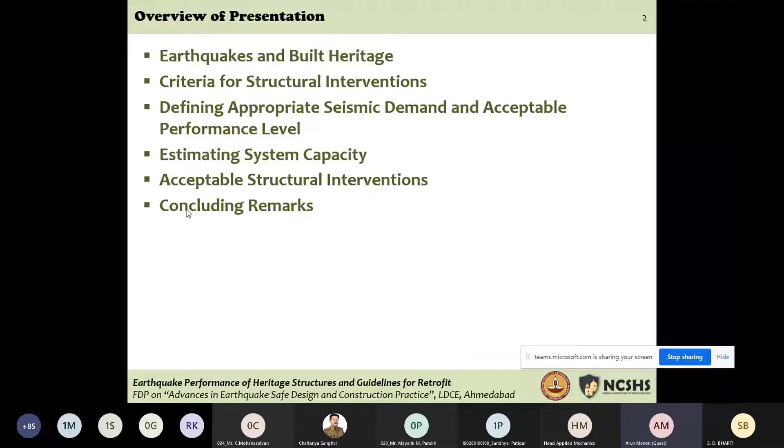So, as I said, LD College is positioned in Ahmedabad, which two decades ago saw one of the worst earthquakes in this country. But historical constructions typically have augmented vulnerability to natural disasters. The Bhuj earthquake is just one example.

In fact, records previous to the earthquake and post-earthquake tell us that Kutch district alone had about 15,000 enlisted heritage properties, and about 10,000 of them were destroyed or extensively damaged. So you're talking of one event that lasts for a few seconds that can wipe out two-thirds of what human beings have been able to build over centuries.

So that's only one event, as I said. There are multiple events: the Indian Ocean tsunami in 2004, the Kashmir earthquake in 2005, the Sikkim earthquake in 2011, the Kedarnath floods in 2013, the Kashmir floods in 2014, the Nepal earthquake in 2015, the twin earthquakes, the Myanmar earthquake in 2016. Of course, after that there have been smaller incidents, but the big ones have given us a respite of about 5 to 6 years now.

Within a context of multi-hazard assessment, it is important that we focus on earthquakes, which are sudden accidental loads that come onto these constructions. But we should remember that these constructions are susceptible to multiple hazards, and that's why floods could be a problem, cyclonic storms could be a problem, and one has to examine it within a context of multiple hazards.

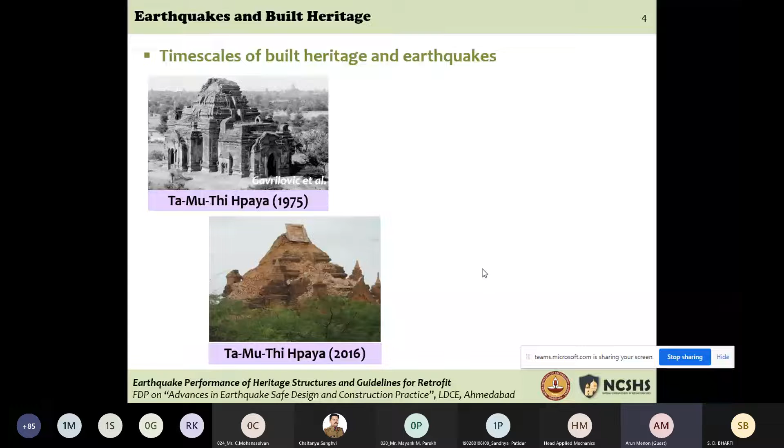So this is one of the monuments damaged in a big earthquake that happened in 1975. But in 2016, 41 years later, an earthquake comparable in magnitude and effect to that same earthquake occurred, and it's the same monument I'm showing you, from a slightly different location. There was reconstruction of significant portions of the spire, and in 2016 we see exactly the same damage. So you're seeing the same monument affected by two significant earthquakes within a span of four decades.

In this context, there's this fantastic book that those of you interested in this subject should look at. The name of this book conveys everything. In fact, this is one of the few books where if you read the title, you understand what the author really wants to say in all the pages of the book. This is a book called Between Two Earthquakes, written by Sir Bernard Fielden, who is considered the father of modern conservation worldwide.

If you go to the website of the Getty Conservation Institute, GCI, of the Getty Foundation, United States, you will be able to download this book for free. It's called Between Two Earthquakes: Cultural Properties in Seismic Zones. In the preface, Sir Bernard Fielden very eloquently says, lessons must be learned continually, and we must always be aware that we live between two earthquakes as far as cultural heritage property is concerned, because these have been around for such a very long time.

And that's very true. If you're looking at our neighborhood, then you know that the Bhuj earthquake in 2001 was preceded by the Allah Bund earthquake in 1819. The Nepal earthquake in 2015 had a history that in 1934 we had the famous Bihar-Nepal earthquake. And Bagan, here I was talking about 1975 and 2016. So you see, it may be 180 years, it may be 75 to 80 years, it may be 40 years.

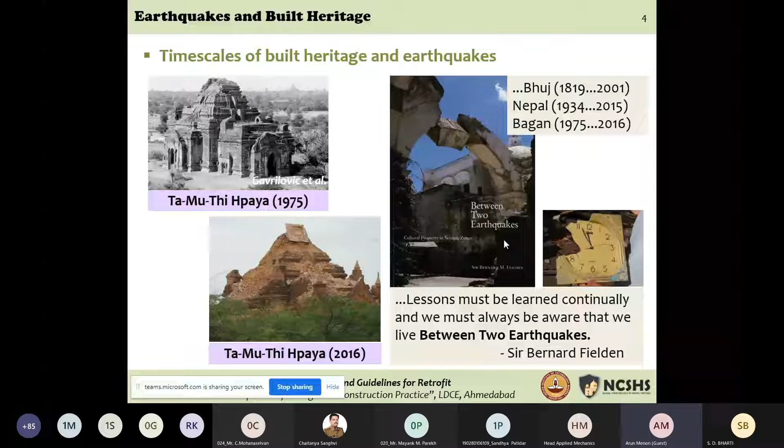Now, the same issue of the timelines between built heritage and earthquake, in a different context, in a different sense, was also very eloquently put forth, particularly for the Indian subcontinent, by Professor Jain, who was at IIT Gandhinagar all these years as director. And I call it the magnitude frequency conundrum of the Indian subcontinent. Professor Jain, in a very interesting paper in 2005, says we have to reflect on the memory and the impact of relatively high frequency of large earthquakes versus relatively low frequency of moderate earthquakes.

So if you have a region that is subjected to frequent moderate earthquakes, then the inhabitants of the region, in their own lifetime, have seen multiple moderate earthquake events and are mentally prepared, and change construction practices to protect their constructions. Whereas if you're living in a region where moderate earthquakes are just too few, don't happen, but large earthquakes are rather frequent—every 50 years, every 70 years, every 100 years, every 180 years—then the problem is the current generations do not have an idea of what it means to see heavy damage in an earthquake.

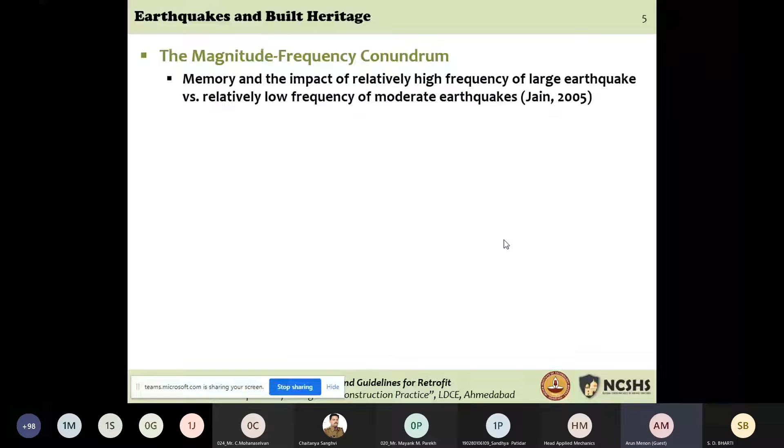It may pass one or two generations before the next massive earthquake comes. Unfortunately, since the memory of the earthquake is not present, the construction practices are not necessarily reflective of the potential vulnerabilities that exist. This is a problem of the Indian subcontinent, where moderate earthquakes are too few and large earthquakes do occur—the Andamans, the Himalayan region, Bhuj, Kutch Peninsula. So this is a problem peculiar to the Indian subcontinent, and one of the fundamental difficulties we've had in improving earthquake safety in our country.

If you actually look at the 475-year return period global seismic hazard map, you will see that it really reflects the problem we talk of. A large part of the country is in moderate to low seismic zones, and there are regions where large earthquakes can be expected, but the frequency of these large earthquakes versus the frequency of moderate earthquakes is what is affecting earthquake safe practices in the country.

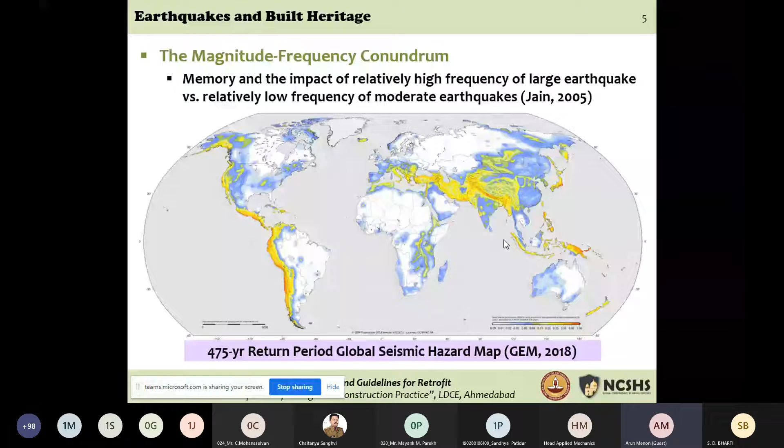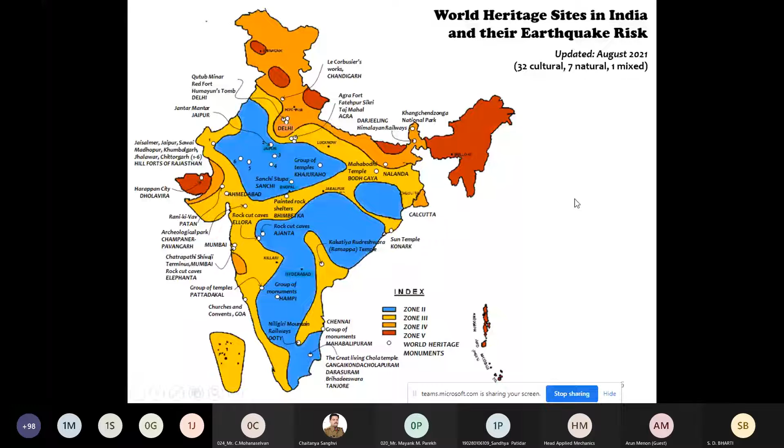Let me now give you a general overview of historical constructions particular to the Indian subcontinent, and take you through the reasons for their earthquake vulnerability.

One of the most common construction typologies is the post and lintel construction, or the trabeate stone construction. The word trabeate comes from the Latin word trabs, meaning a beam. So post and lintel construction, merely placing lintel beams or beams on posts, is called post and lintel or trabeate construction. If you were to look at the trabeate constructions...

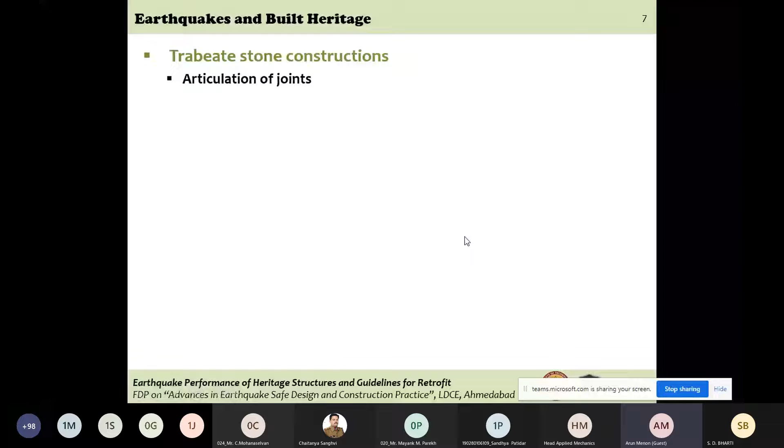The articulation of the joints between the post and the lintel has been a point of focus. How do you connect the post and the lintel is an important aspect that needs attention.

But if you were to look at different regions in the country where these are constructed, and I take the example of South India or peninsular India, where there is a very large number of such constructions, we don't see any articulation of joint, any specific detail in the articulation of a joint between the post and the lintel.

This possibly is a reflection of a region's low seismicity levels. If you take South India, in the last 500 years, the largest earthquake has been a magnitude 6 earthquake in 1900 in Coimbatore. There is no evidence of any other larger earthquake in the southern part of peninsular India. So it could well imply that these constructions are the way they are because this is a low seismic region.

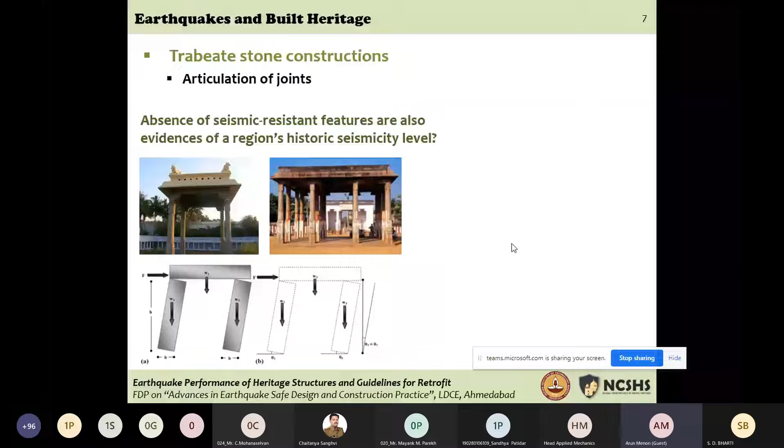However, in these regions, even if there is a moderate event, the consequences can be alarming. So that is something that we need to definitely worry about.

If you were to, on the other hand, look at similar constructions in Kathmandu Valley, or even similar constructions in Bhuj or in the Himalayan region in Kangra Valley in Himachal, you will see that the post and lintel constructions go through an important articulation of the joint. You will see tenon and mortise joints, as you can see in this picture here.

There's a projection in the stone and a depression in the plinth, or vice versa. You will see that the joints are articulated. You have shear keys that have been introduced in the construction typology, in the construction features. This is clearly the seismic resistant construction vocabulary, I would say, in these regions.

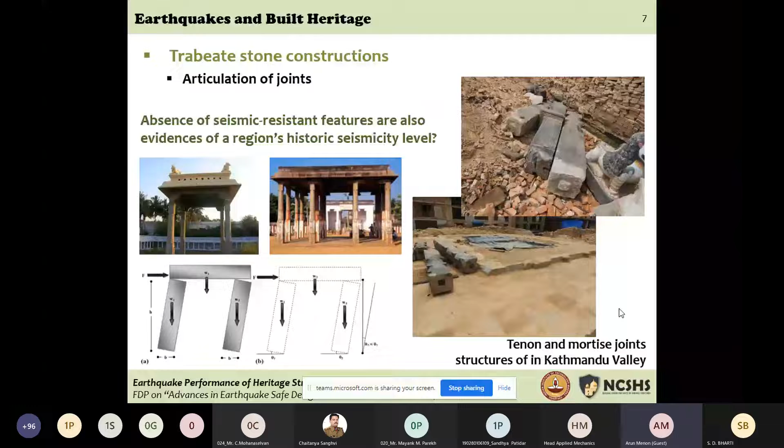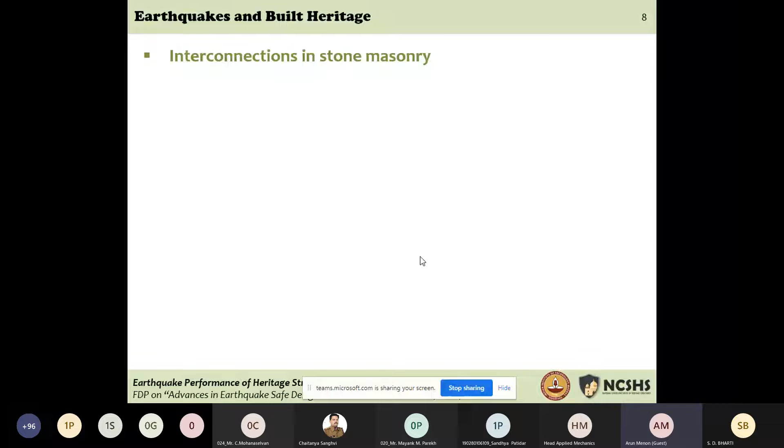We also see interconnections in stone masonry. So stone masonry is typically built without too much of binding material like mortar.

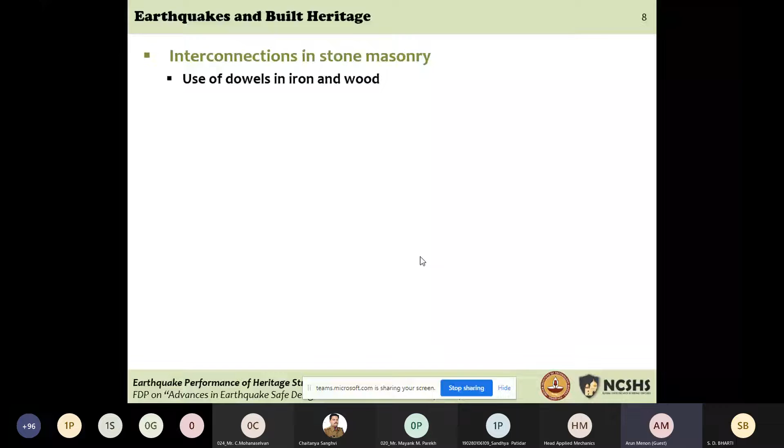The mortar is present more as a leveling agent rather than a binding agent with any tensile capacity. So typical dry stone constructions are connected using dowels in iron and wood. The classical example that I can think of is the stone constructions in Gujarat.

This is a picture from Ahmedabad itself, Achyut Kuki's mosque. The tower had partially collapsed in the 2001 earthquake. Examining the construction, we could very clearly see how two blocks of the circular tower were held together with wooden dowels, embedded in sockets cut out in the stone and filled with lime mortar.

Over time, the wooden dowel would deteriorate, and the lime mortar would get washed away, and ultimately you're just left with dry stone construction, which does not have any tensile capacity, nothing holding these blocks together. In an earthquake as severe as the Bhuj earthquake, you could have collapses like the ones that you see here.

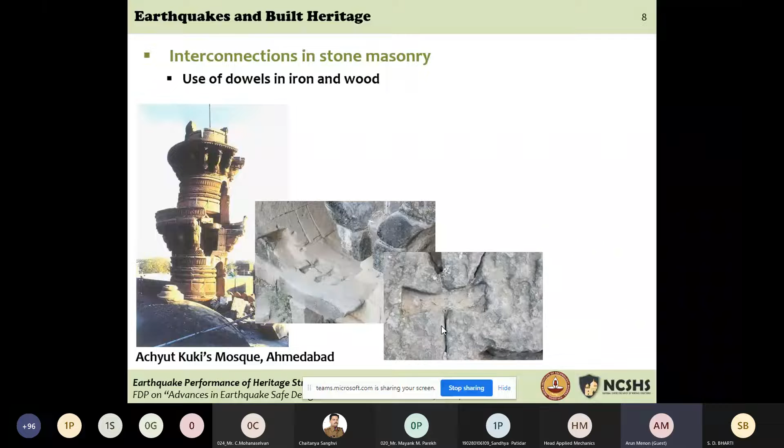A similar situation, these are pictures from constructions near Patan in Gujarat. You can see very clearly what I'm talking about. Two stone blocks placed next to each other with a little depression cut out in the stone, into which lime mortar is placed and the wooden dowel is embedded. This helps keep these blocks together, something that has zero tension capacity because there is no binding mortar with tensile strength. These dowels, made of wood, which has some amount of ductility, help keep these blocks together.

If you go to Kangra Valley, look at Himachal Pradesh constructions in Kangra - this is Kangra Fort, which was very badly affected in the 1905 Kangra earthquake. Large parts of the Kangra Fort collapsed in that earthquake. You can see how the construction, possibly the reconstruction, has made use of iron dowels, used to basically interconnect these blocks of stone masonry.

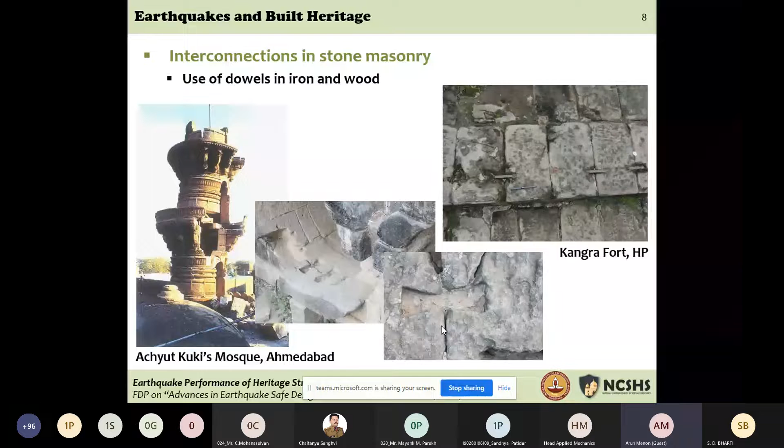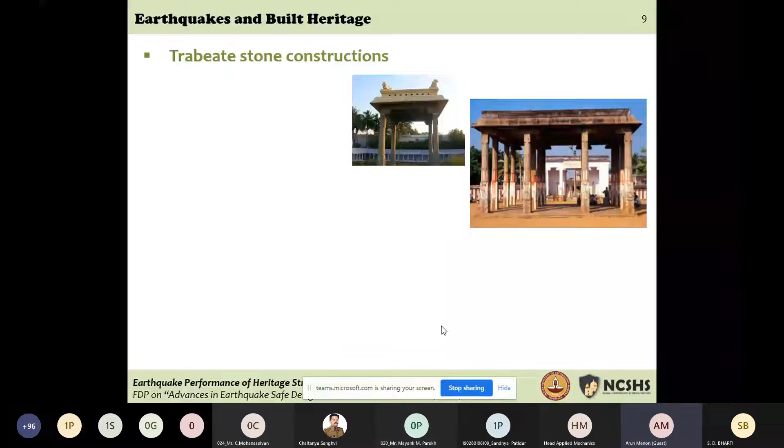Interestingly, South Indian constructions, these mandapas - you're looking at 16-pillared, tall, symmetric constructions. They could also be tall or short, 4-pillared mandapas. You could also have a series of configurations which are even asymmetrical constructions. We have looked at studying these constructions for their earthquake safety because we were interested in understanding the vulnerabilities historical constructions have in low to moderate seismic zones.

Through limit analysis, rigid block analysis, which is actually quite appropriate for such post and lintel constructions without the use of binding mortar, you identify which is the governing failure mechanism. In this case, the governing failure mechanism is really the overturning failure.

This is the static limit analysis that is conducted, which is typically a lower bound capacity that you would get.

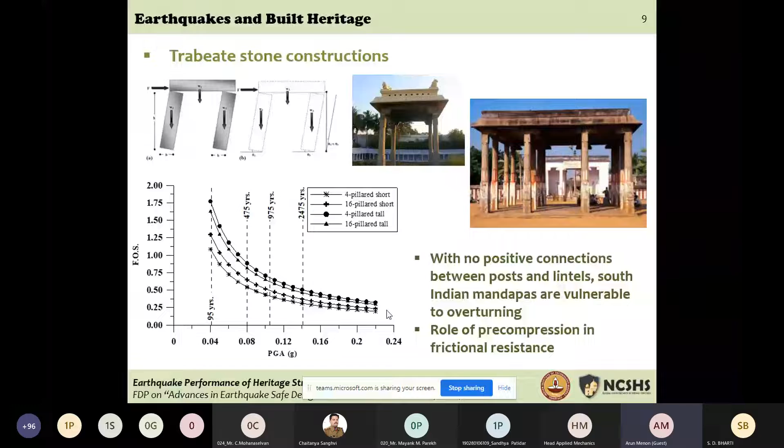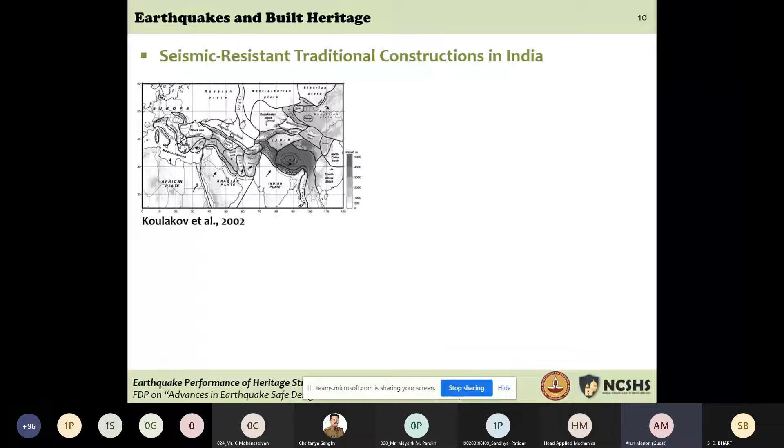If you were to look at the traditional constructions in India, not the historical monumental constructions, but traditional constructions - India has a significant stock of traditional seismic resistant constructions that have developed over several hundreds of years in regions of high seismicity. I'm sure Professor Durgesh Rai and Professor Hemant Kaushik, I don't know if he has spoken to you, but I've definitely spoken to you about some of these interesting constructions.

Dhajji Dewari in Kashmir, the Taq construction in Kashmir, the Kath Kuni construction in the Himachal region, the Ekra or Assam type construction in Assam and Sikkim are important examples. Also another interesting example which is in your neighborhood is the Pols of Gujarat, and Pols in the historical center of Ahmedabad.

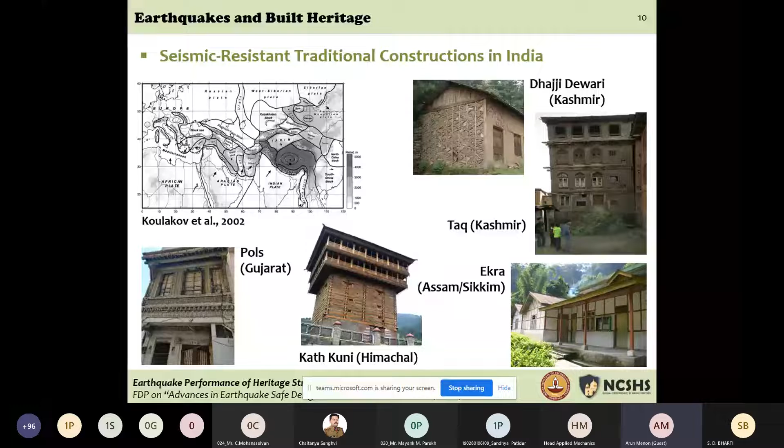While the Dhajji Dewari, Taq, Ekra and Kath Kuni constructions have a vocabulary of construction system which is very clearly responsive to earthquake actions, the Pol constructions are not that well understood. They have survived well during earthquakes, but you do not have a very systematic earthquake resistant feature in the Pols, and so one needs to understand this quite well.

With respect to this, the question always on my mind has been: were they designed to be earthquake resistant, or are we deeming them to be earthquake resistant looking at how well they have actually been working, or are those features present in them consciously introduced to ensure earthquake resistance? There's been enough examination of this problem by people in Gujarat and elsewhere.

I had this interesting opportunity of studying it a little carefully with one of the students from CEPT University, working on conservation, a master's in conservation and rejuvenation.

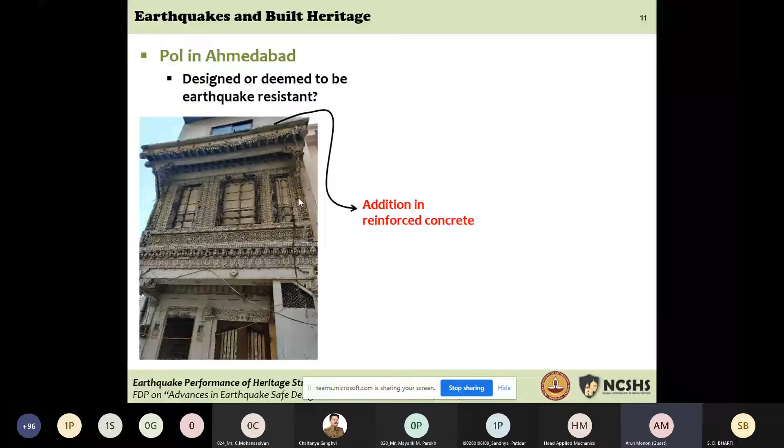The reason why one has to look at such problems a little more carefully is that a number of these Pol constructions, if you take the historical center of Ahmedabad, are undergoing modifications, although they are protected World Heritage city portions of the built heritage. There are simple things like floors being added in reinforced concrete or replaced, and new elements in reinforced concrete are added.

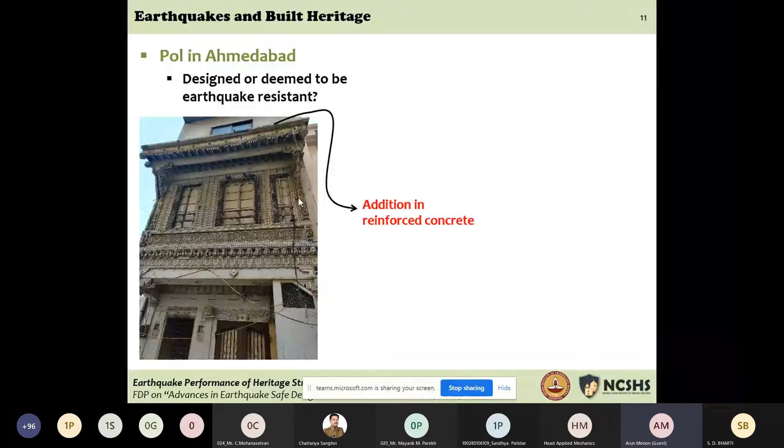The question is, how do we understand the original construction? What are the governing characteristics for good earthquake response of such constructions, and what should we be careful about when these are undergoing renovations, expansions or restoration? As I said, this is rather well documented, but structural studies on these have not really been done quite extensively.

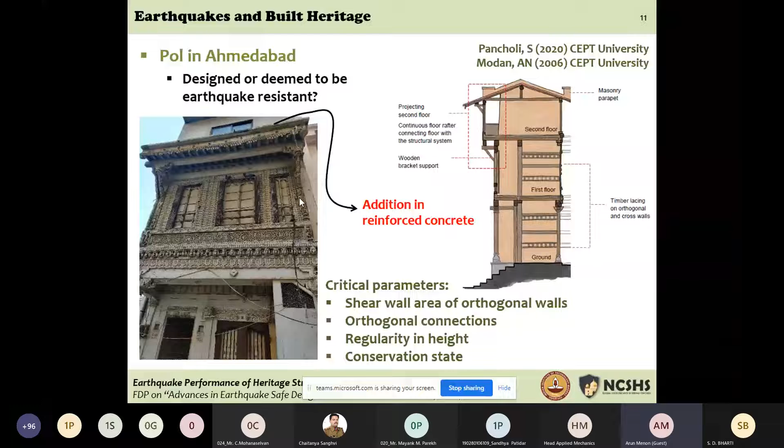The work actually identified that the shear wall area of the orthogonal walls, the distribution of shear walls in two directions, the connections between these orthogonal walls, the regularity in height, and the state of conservation seem to be the most critical parameters of such constructions. These four factors seem to have a significant effect on the safety of such constructions. I would call them the most influencing parameters, and any restoration or renovation effort on these constructions has to be very careful in not disturbing these important four parameters.

With that extensive introduction on the problem of historical constructions in a subcontinent like India, where earthquakes are a significant problem but not a frequent one, the issue of built heritage needs to be looked at very carefully. It's important for us to understand which are the statutory provisions, doctrines, documents and guideline documents available for conservation.

In that context, it's important to know that the National Conservation Policy of the Government of India, brought out by the Archaeological Survey of India in 2014, is an important document. It is one of the few documents worldwide that says monuments of national importance - and mind you, the Archaeological Survey of India has about 3,690 monuments - have to be scientifically assessed and retrofitted where warranted.

It also requires that conservation efforts at any monument be accompanied by disaster management plans. So you're looking at 3,690 monuments or sites with so many monuments, which have to undergo a systematic process of assessment and retrofit where required, and disaster management plans also have to be drawn up for risk reduction.

The two other important documents are guideline documents, but the specific rules and interventions have not yet been worked out and are in the process of being developed through specific projects. The National Disaster Management Authority, Government of India, under the Ministry of Home, came up with two documents in 2017: the Disaster Management Guidelines for Cultural Heritage Sites and Precincts, and the Guidelines for Museums, by the same authority.

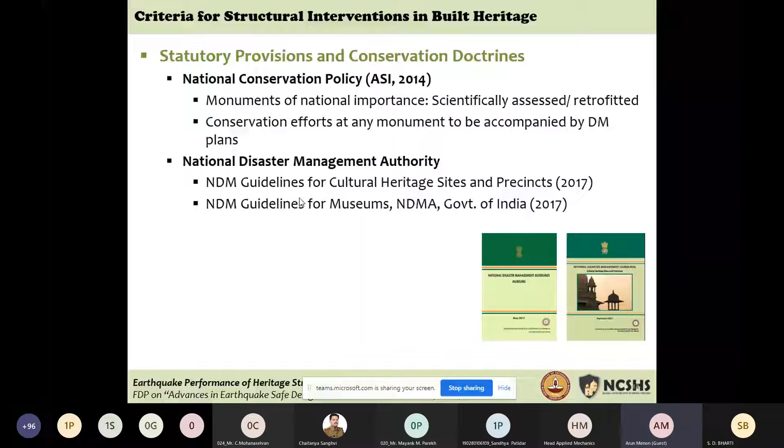It is also the right place for me to talk about what the international practice is, and my reference is to an important scientific committee. It's an international scientific committee that deliberates on the matter of analysis, conservation, and structural restoration of architectural heritage. The committee is referred to as ISCARSAH of ICOMOS. ICOMOS is the International Council on Monuments and Sites.

It is an advisory body to UNESCO on matters of culture. And ISCARSAH is an international scientific committee sitting within ICOMOS International. Now, what does ICOMOS state?

That you cannot look at cultural heritage purely from an archaeological, architectural point of view, or purely from an engineering point of view as an infrastructure. It is important that you have a combination of scientific and cultural insight when you're looking at such constructions. It's important to identify the different expertise necessary as feeders to the decision-making process as far as historical constructions are concerned. And therefore, you need an interdisciplinary approach. Multiple answers may be right answers, and you have to examine these.

In such an interdisciplinary approach, particularly when structural safety is a problem, structural engineering can actually provide the scientific support necessary to ensure safeguard of the building as a whole, ensuring life safety, but also ensuring that the consequences on the identified heritage value are minimum.

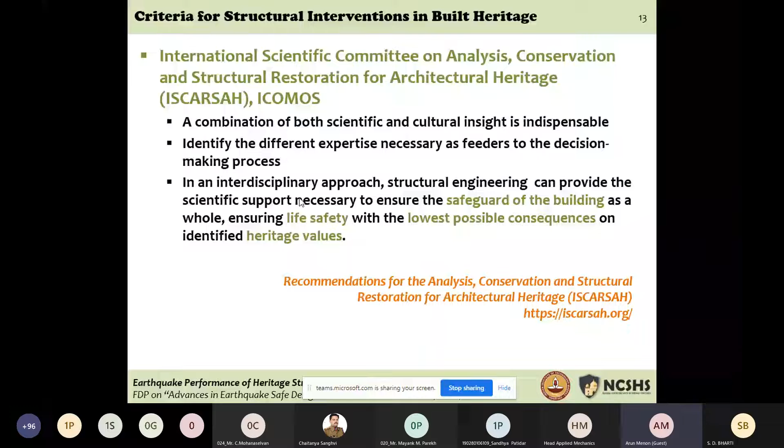In this context, I would recommend that you go to the website of ISCARSAH and look up documents which give the recommendations for analysis, conservation, and structural restoration of architectural heritage. It's called ISCARSAH.

Talking of the criteria for interventions in built heritage, my reference is to the draft document which ISCARSAH is preparing. It's a second document—earlier there was a guideline document. Now the guideline document is being updated and brings to the table far more interesting concepts of sustainability, of environmental sensitiveness, and so on, when we do activities like restoration and the protection of cultural heritage.

So it says the criteria for interventions in built heritage: you have to identify what are the character-defining elements of the built heritage. And mind you, this is not only for the architectural team or the archaeological team—the engineering team also should be able to understand these aspects before coming up with solutions. So understand the character-defining elements of the built heritage.

They may be tangible and they may be intangible as well. Meaning, if there is a certain type of carving on the stone, or a certain type of painting, or a certain type of sculpture, or a certain type of construction system—that is the tangible, physical element of the heritage. But the intangible is that it represents a knowledge that our ancestors had, which developed at a time when science and technology were at a very different stage of development. So there is an intangible heritage which is also present.

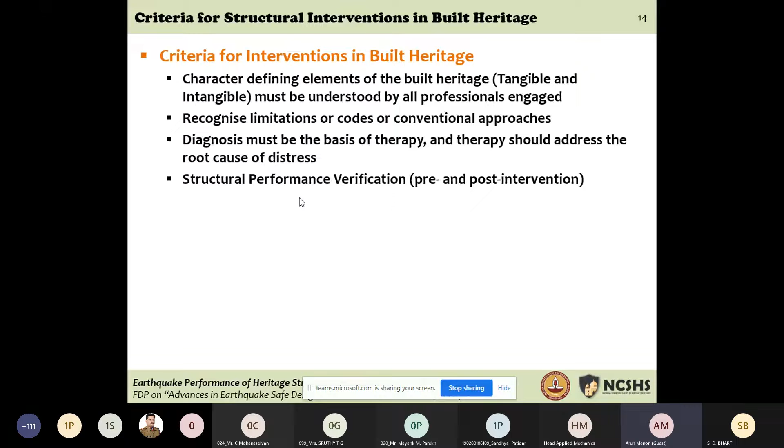We must also be able to do a structural performance verification before any intervention. What is the situation? If an intervention is going to be put in place, how do you expect the structure to perform better? That must be demonstrated to the client before acceptance of an intervention proposal.

We also have to think about the concept of minimal intervention. As a professional called to look at a historical construction, you might want to bring your best expertise and do everything possible for it. But we have to realize this historical construction might have been here for 500 years, while you and I might have a professional career of only 20 or 30 years. So we have to be quite humble in what we want to do to the structure and try to minimize that—be minimally invasive, both in terms of destructive tests and interventions you want to carry out.

We need to strike a balance between structural safety, protection of heritage values, and respect for the structure's authenticity. You must ensure that what you're trying to put in place does not disturb the reason why the structure is valuable. The structure has its own character, its own authentic materials and features. We must not try to cover these up or change them inadvertently in trying to make it safe.

Now, the issue is when there is a lot of uncertainty in the materials, in their strengths, in the structural system—when there are uncertainties, we tend to take an overcautious approach. You know that in aeronautical engineering, they try to minimize uncertainty because you cannot carry so much weight. You want uncertainty minimized so that factors of safety are accurately known, material consumption is lesser, and the aircraft becomes light. So the higher the uncertainty, the higher the material required to ensure the structure is safe.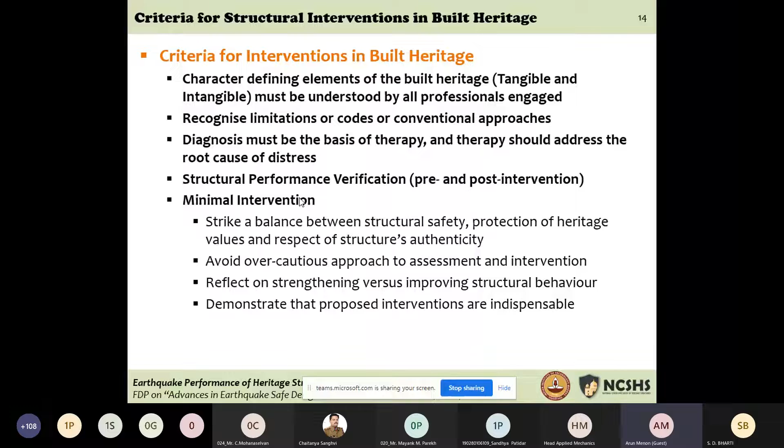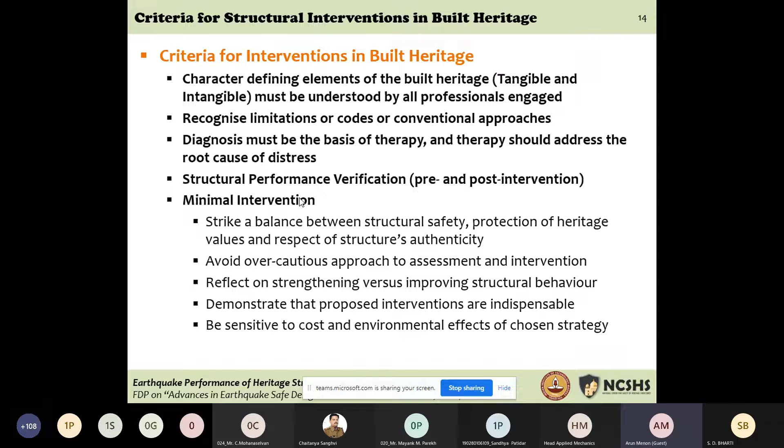You have to be sensitive to cost and environmental effects of the chosen strategy. We live in a world where resources are finite, and we have to be careful that we're not unnecessarily using up material—sometimes we have to quarry stone, sometimes get burnt clay bricks. So let's be conscious of the cost and environmental effects, because sometimes interventions in historical constructions may turn out to be very expensive, and it's possibly not easy to mobilize that amount of money. Is it essential? That's something you must again ask.

Another criterion is compatibility with original materials and techniques. The original materials are a record of history—how materials were used in the past, processes of manufacture of those materials, skills of artisans, and so on. So we must be careful that the new materials being used are compatible with these old materials, not only from aesthetics, but also from mechanical characteristics—strength, stiffness, ductility, thermal properties, and so on.

Durability of interventions—we have to ensure that the interventions we are proposing today last for a few decades and do not get deteriorated in a few days or a few years. You carry out reinforced concrete jacketing in a historical construction that's about 500 years old, and in 10-15 years, if the reinforced concrete gets corroded, then your intervention is in no way a match to the age of the historical construction. So the durability of the intervention is another important aspect.

As I said, try to use minimally invasive techniques and as much as possible non-invasive techniques. So where you don't have to damage the historical fabric to put in place the intervention is a better approach than having to damage the historical fabric to put it in place.

We have to think about this concept of reversibility we've been talking about for several decades—that if you put in an intervention, you must be able to reverse it. Reversibility of intervention was an important concept. But today we've come to understand that you cannot reverse the state of stresses after you have put in place an intervention. So the concept of reversibility is a farce. You cannot really reverse the situation in the structure. You can at most remove the intervention, but the state of stress might not go back to what it was earlier.

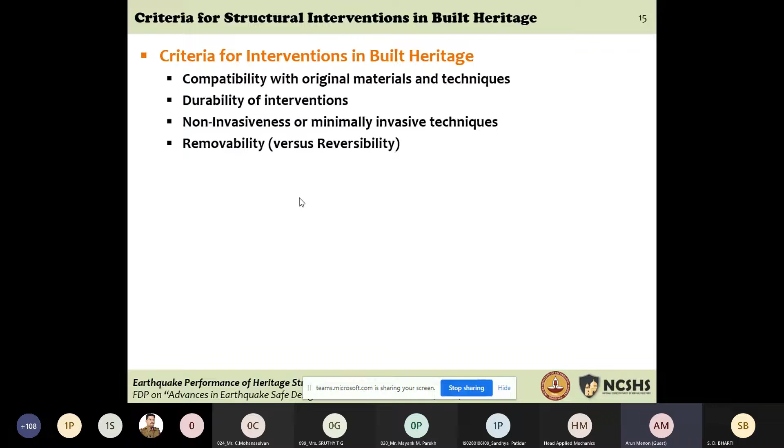So reversibility may not be possible, but removability is something we must think about in putting in place an intervention. With reinforced concrete jacketing, removability is a question, because if you try to remove it, you might damage the historical fabric. But if you put steel ties—unbonded post-tensioning ties—around a column or a wall, can you remove it? Yes, you can remove it without having bonded it to the historical substrate. So reversibility versus removability is something we must be able to think about.

Repairability and pre and post natural disaster structural maintainability: the structure will continue to get affected by natural disasters, lesser maybe because of the interventions, but if there is damage, you should be able to repair that damage. Your intervention should not prevent you from reaching the part of the structure that needs repair. So repairability is important.

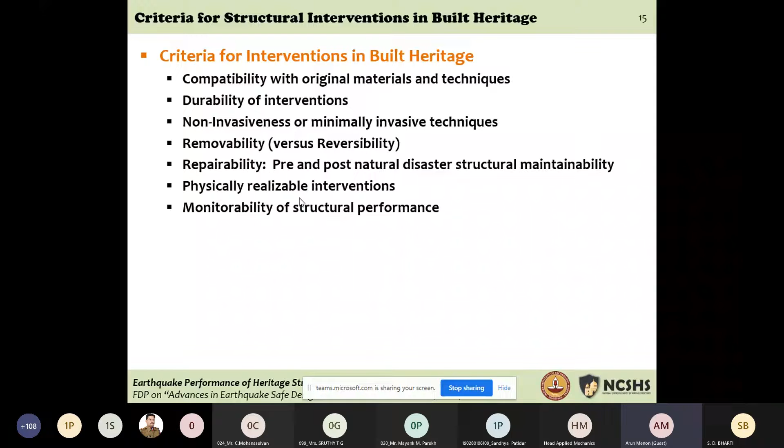Of course, in the design on paper, you might have very interesting interventions, but these may not be physically realizable. Finally, it has to be feasible—someone has to execute this on the site. So one has to think of physically realizable interventions, and you should be able to monitor the structural performance after the intervention is put in place. You must be able to measure some structural performance parameters, to see how the structure is responding and so on. So monitorability is another important aspect.

Having said that, let me move on to another area that is being debated today across the world. Some countries have accepted the appropriate approach I'm about to describe, but in other countries it's still a wide open problem—that is, when you're doing seismic assessment of historical constructions, what is the appropriate seismic demand and what is the appropriate performance level?

The key concerns, as I mentioned earlier, are if you were to pick up code-prescribed earthquake performance levels—and this is typically defined for modern constructions, new designs—and therefore the hazard level. You have the design basis earthquake, you have the maximum considered earthquake. Are these appropriate for seismic safety assessment of historical monuments?

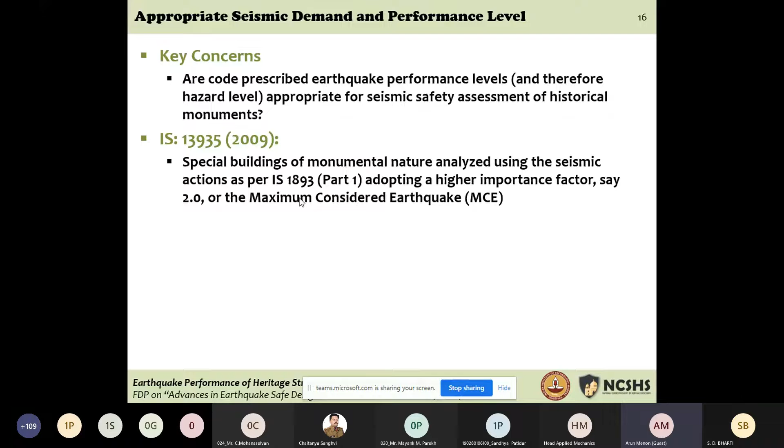In this context, if you were to examine what IS 13935:2009 says, special buildings of monumental nature should be analyzed using seismic actions as per IS 1893 Part 1. But mind you, IS 1893 Part 1 is our seismic design code for new constructions. Yet 13935 actually tells you to adopt a higher importance factor, say even 2, or adopt the maximum considered earthquake.

We know that we use design basis earthquake for seismic design for regular constructions, and depending on the importance of the structure, we use an importance factor. But you see, 13935 actually prescribes that you use a higher importance factor or a maximum considered earthquake. What does it mean? Your seismic demand is automatically going to be higher.

And if you're going to check your historical construction against such a high seismic demand, you will see that the structure is inadequate. And when you see that the structure is inadequate, to make it safe, you will introduce interventions which can compromise the historicity of the historic value of the construction.

What about IS 13828? IS 13935 is for retrofit of masonry constructions. IS 13828 is for improving the seismic safety of low strength historical constructions. And it says use an importance factor of 1.5 for monumental buildings, irrespective of earthquake zones.

So the moment you use a higher importance factor, or the moment you use the maximum considered earthquake, you're simply increasing the seismic demand. That's something we want to keep in mind. This will simply lead to substantial retrofitting and strengthening, and that can compromise the historical value of the construction.

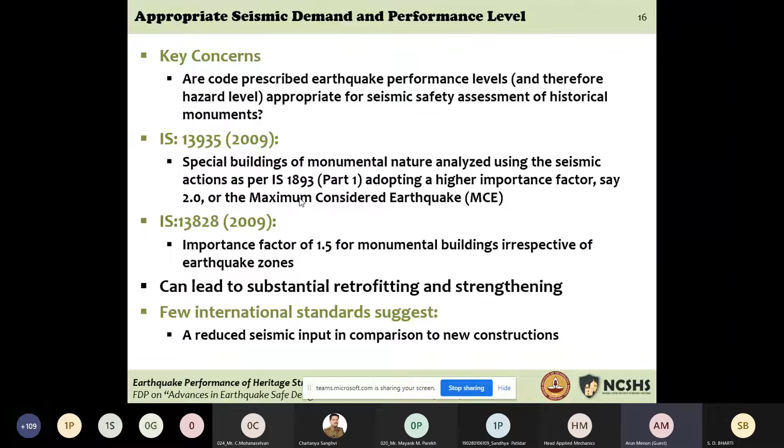So what are these documents that I'm referring to? Guidelines for evaluation and mitigation of seismic risk to cultural heritage, prepared by the Ministry for Cultural Heritage and Activities, Government of Italy, talks about identifying what is the reachable seismic safety index for a given historical construction.

It is defined as the ratio between the level of attainable seismic protection compatible with the necessities of the building and the desired level of protection based on category of use and importance. So, ratio between the level of attainable seismic protection—you have a structure, how much can you intervene to make it safe, given that the building has important features, important paintings, or has a certain historical value.

And what is the desired level of protection that you want to give based on whether it is being used as a museum, or just used as an archaeological monument, or if people are living there, and its importance. This becomes a reference value for the evaluation of the compatibility of planned use and for the operational decisions on strengthening.

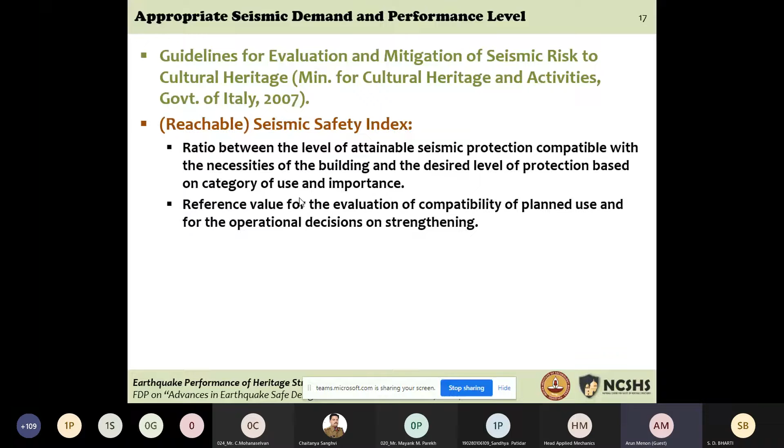So once you are able to check this seismic safety index, then you can even take a decision on whether you will allow people to visit such a building—are you going to allow people to go inside, are you going to allow people to stay inside, or how many people will be allowed inside, what type of use you want to put it to—and also decisions on how much strengthening you should do in these constructions.

And then it's also important to see different levels of seismic evaluation. There are level 1, level 2, level 3. A level 1 seismic evaluation is qualitative—it just looks at features, missing features, and identifies deficiencies.

Then for historical masonry constructions, it is useful to do local collapse mechanisms, because there are parts of the structure which may not respond globally with the structure but undergo local collapse mechanisms, like a parapet, like a gable of a wall of a sloping roof construction, or a tower, or a portion of a tower. So there can be local collapse mechanisms in the construction, and a level 2 evaluation asks you to check all these local collapse mechanisms.

If you remember the rigid overturning of the mandapas, that is actually based on limit analysis principles, which is typically used for these local collapse mechanisms. And then you can do a global evaluation of the construction to see the global capacity of the construction.

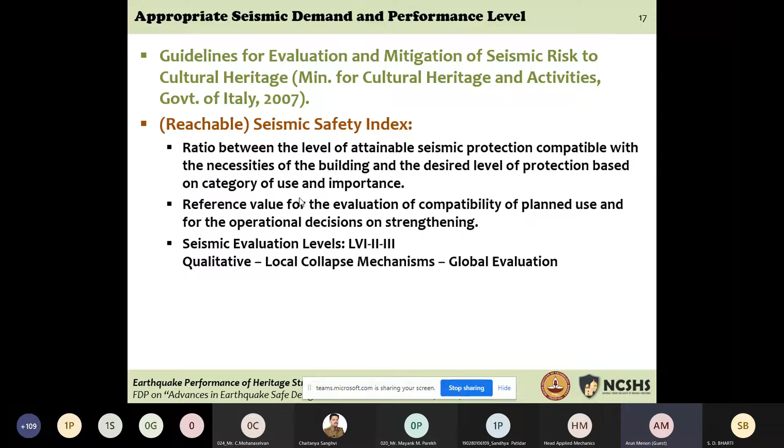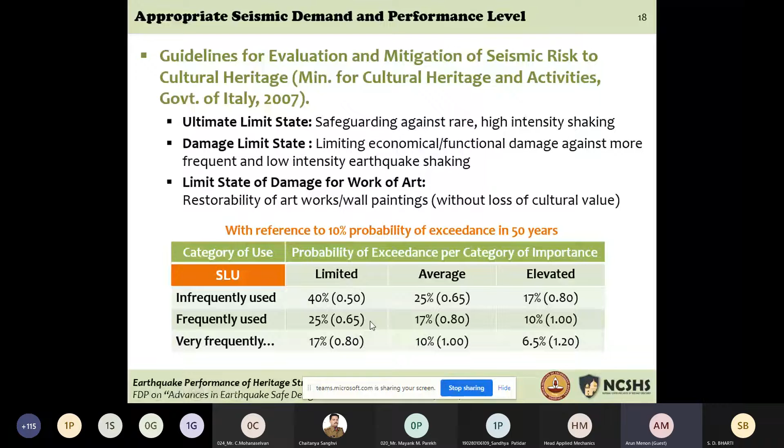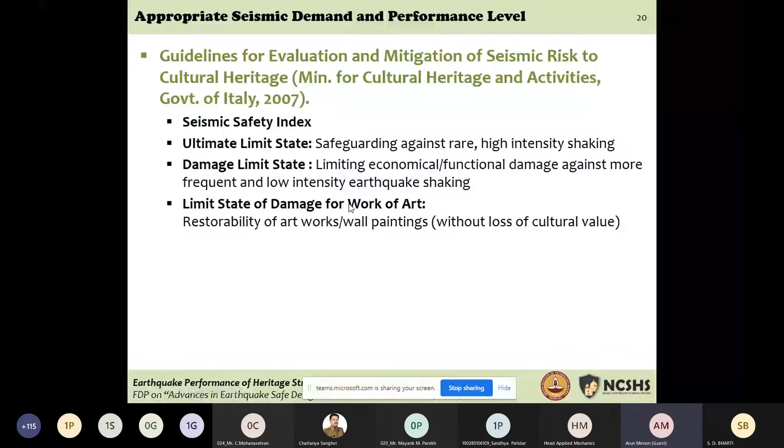But if you see in the bracket, with respect to the prescription for modern constructions, the seismic demand is being reduced from about 50% to about 120%. So in most cases, you're actually seeing the seismic demand being lowered for historical constructions, structures of historical value. For the SLD, the damage limit state, you can also see it's about 50% to 120%, depending on the frequency of use and the category of importance. So this is one of the codes which prescribes this sort of framework.

Another one is the New Zealand standards - the New Zealand Society for Earthquake Engineering 2017, New Zealand technical guidelines for seismic assessment of existing buildings, parts A, B and C. Parts B and C bring in the concept of percentage compliance to new building standards, making an explicit statement that existing buildings need not comply to 100% of the new building standards. So you will accept a lower safety level as long as collapse prevention is possible. If you can prevent collapse, then you can even reduce the design level of seismic input for designing the interventions to less than 100% of the new building standards.

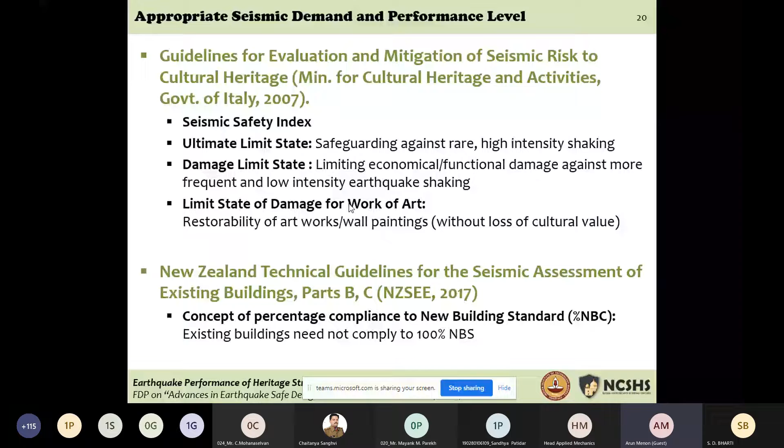Having said that, this important aspect of taking a fresh look at what should be the seismic demand and performance levels for historical constructions - you want to save them, you don't want to lose their historicity, you have to strike a balance between the two. You need to estimate system capacity, and therefore modeling and analysis is required. You have to approach it both quantitatively and qualitatively in any assessment.

In that context, one important aspect is that we must understand there are fundamental differences for such constructions as far as linear elastic versus non-linear finite element analysis is concerned, particularly because you're dealing with materials which have low tensile capacity, low tensile strength. Their compression capacity versus tension capacity is fundamentally different. In fact, most of these constructions in masonry, stone, or brick have zero or almost zero tensile strength. Therefore, the use of linear elastic analysis becomes a problem, and it is better to adopt non-linear finite element analysis.

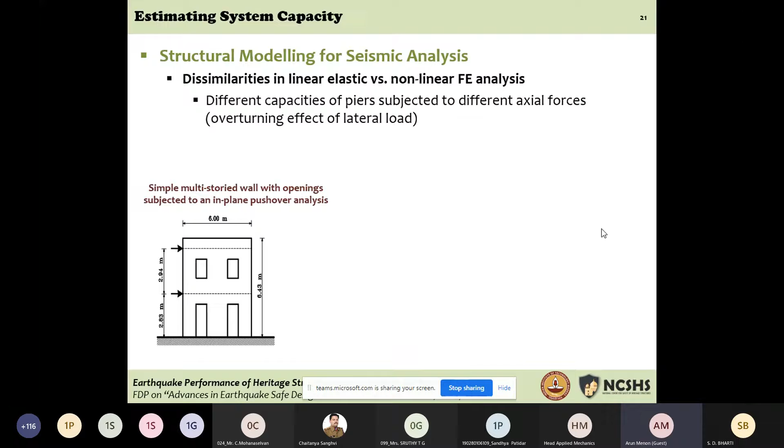A simple example: if you take a masonry wall with openings and subject it to a pushover analysis, in-plane pushover analysis, the piers will behave differently. If you see, the outer two piers are geometrically the same, but the pre-compression level will change because of the overturning moments. The overturning effect of lateral load will change the pre-compression level in the direction of in-plane load. Pier 1 will have the lowest pre-compression, Pier 3 will have the highest pre-compression, whereas the pier in the middle might have no change in pre-compression level compared to the gravity loads that are acting.

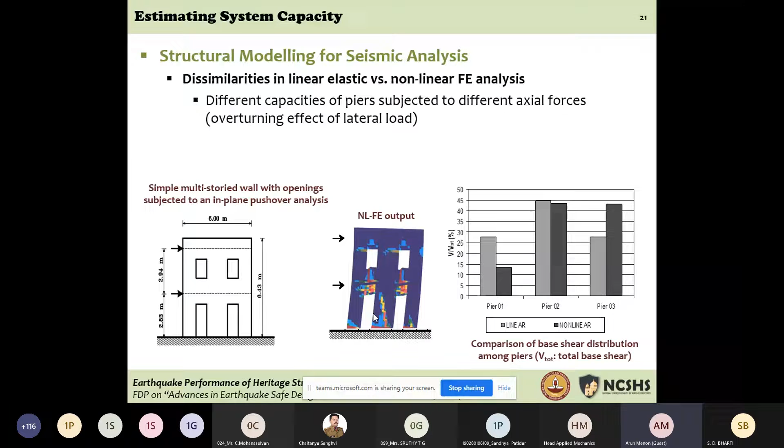With change in the compressive stress, the shear capacity of these piers will change. So Pier 1 and Pier 3 will have totally different shear capacities because of a changed state of compression, and linear elastic analysis will not be able to capture this. If you do linear elastic analysis and compare it, because of the differences in the compression and tension capacity of these masonry piers, linear analysis will give you a totally different picture.

You can actually see that the capacity expected from linear analysis is the same for Pier 1 and Pier 3, whereas in reality, if you do nonlinear static analysis or finite element analysis, you get a completely different governing situation. This is extremely important, as it can be captured only by nonlinear analysis, since forces at the ultimate are distributed according to the strength capacity, tension versus compression, and not the elastic stiffness. Linear elastic analysis will tell you elastic stiffness governs the distribution of demand, but that's not the case in materials which have different tension and compression capacity.

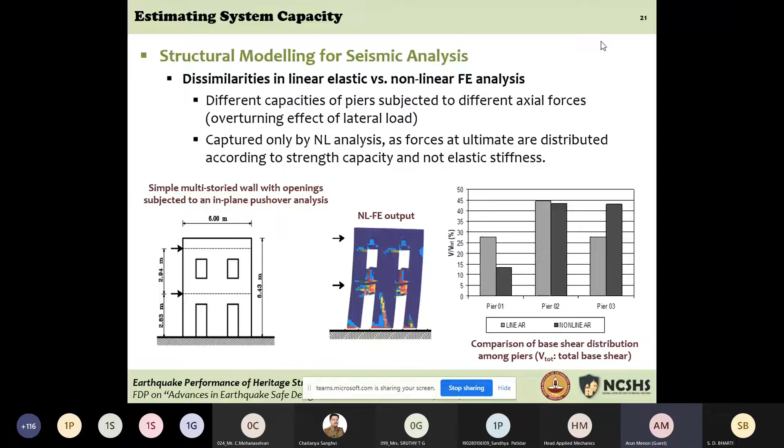If you have reinforced concrete or steel, the picture is different—you don't have that sort of an issue. So this is an important aspect to keep in mind: it's preferable to use nonlinear analysis.

Then you have an entire spectrum of types of modeling and analysis you can do. You can do continuum finite element analysis, treating the masonry as a smeared continuum, and assign tensile capacity and compression capacity to do the analysis. You can do a lumped mass stick model of the structure, or a three-dimensional model, depending on which can capture the earthquake lateral load response better.

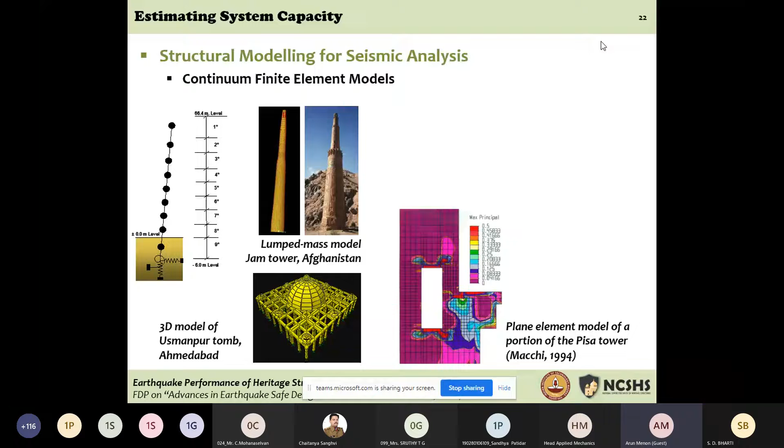Particularly if you're doing continuum finite element analysis, you also want to decide: are you doing a global model or a local model? If a part of a structure is being analyzed, can you use a planar model there, or a 3D model? These are important decisions one will have to take.

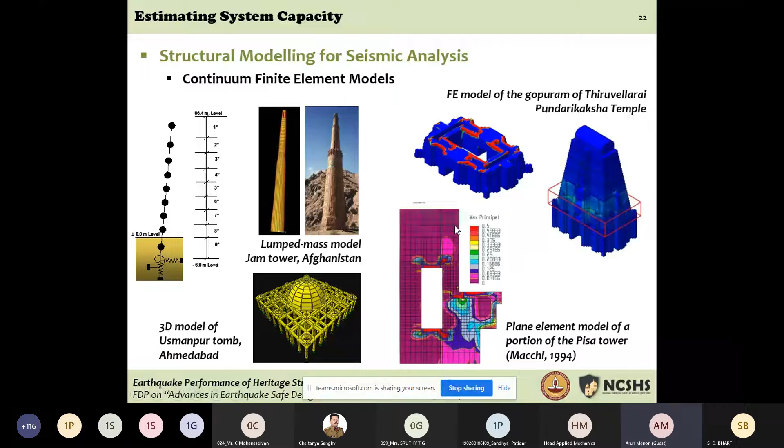You can see a full three-dimensional solid model of a monument versus a planar model of a portion of a structure—these are continuum finite element models that one can adopt.

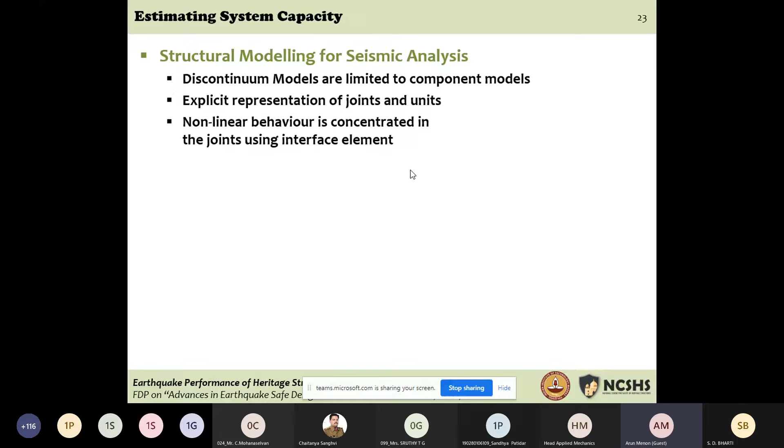Very often, as I said, you will have dry stone constructions which do not have any binding mortar, and the whole concept of a continuum does not exist. Brick masonry with mortar can be considered a continuum, but you might have stone-on-stone construction, where discontinuum is how the construction behaves. So you have to explicitly represent the joints and the units, not as a continuum.

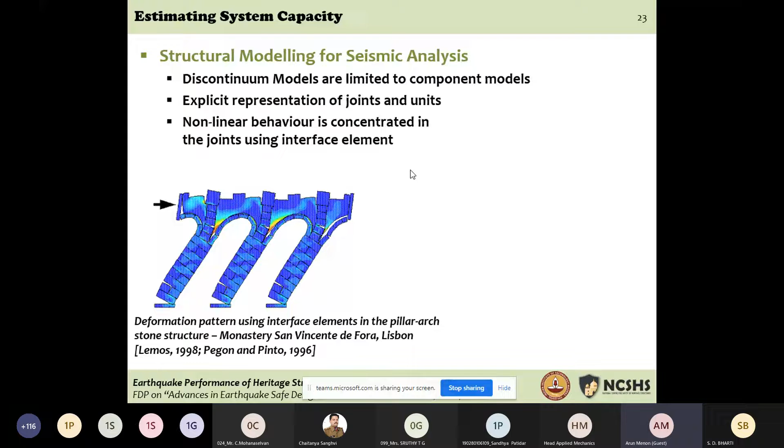The problem is that full global models are challenging because they are very heavy computationally, so you might want to focus on small parts of the structure for such models. Nonlinear behavior here is in the joints—you give a nonlinear law for the joint, and model the units, so you have units and interfaces in this sort of discontinuum model to study parts of a structure.

You can study a part of a wall or part of a colonnade—these are possible.

Equivalent frame modeling is something else adopted for global analysis, where the masonry building, composed of masonry walls with openings, is converted into an equivalent frame made of an assembly of pier elements and spandrel elements, like beam-column elements. This is not finite element modeling where you provide the stress-strain response of the material, but you are actually defining the hysteretic behavior of the element.

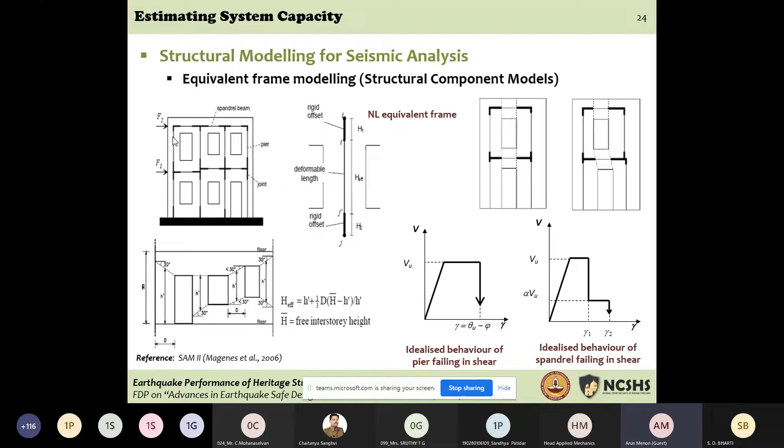So I'll take the pier element and give its hysteretic response, take the spandrel element and give its hysteretic response, and assemble the beams, piers, and spandrel elements. I can also choose rigid connections between them, which is how piers and spandrels are typically connected, giving a rigid offset and assembling in three dimensions an equivalent frame representing the global structure. So you have an idealized force-displacement, shear force-shear displacement behavior for the pier, and similarly for the spandrel, and that becomes the nonlinear inelastic model for the construction.

These shear cracks are typically found in the highly compressed floors of the masonry.

Whereas in masonry constructions, regions which do not have too much pre-compression, like the parapet wall, the tympanum, this particular entablature, or if it's a single-storied structure, the entire facade, these can undergo local collapses. That is not a global mechanism, but only parts of the structure failing in a rigid manner.

These fail more due to loss of equilibrium than exceedance of material capacities. The tension crack forms because of poor tensile strength, but after that there's loss of equilibrium and displacement demand governs, and these can be checked through local collapse mechanism analysis for seismic verification.

So one has to do two levels of analysis using rigid body kinematic analysis. One is at the global level, where you have the full global model, whereas at the local level you can check whether parapets will collapse, whether some gable walls will collapse, and so on.

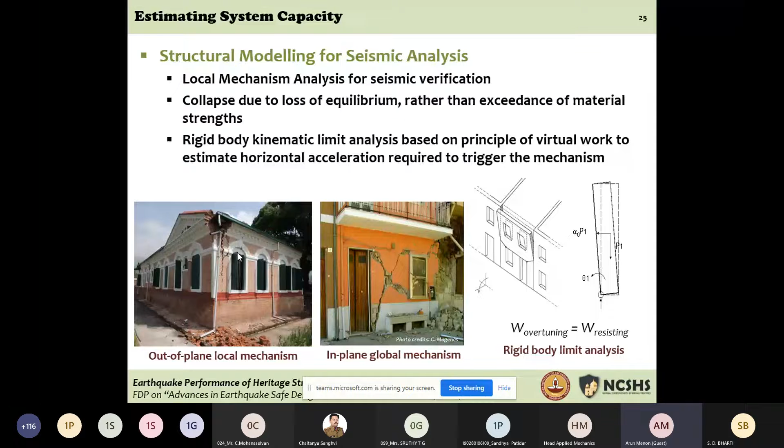This can be based on limit analysis methods using the principle of virtual work to estimate horizontal accelerations required to trigger the mechanism, and check if the displacement capacity is available in these small substructures and whether they are susceptible to failure. This is something you can try to estimate.

So as I'm trying to conclude, here's a small example where a global analysis is carried out on a historical masonry construction.

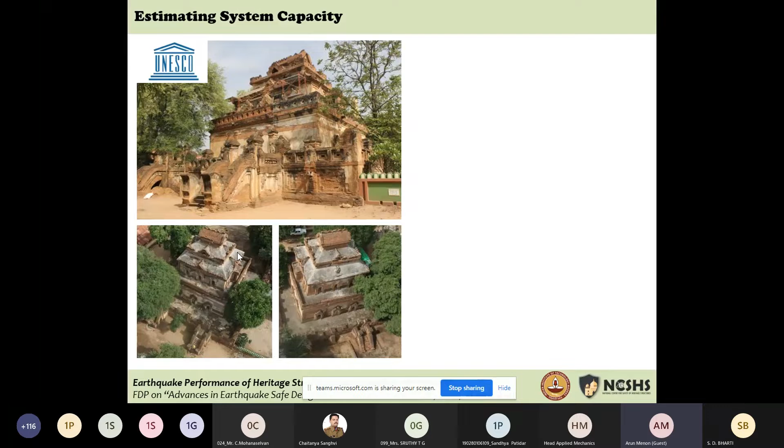It was affected. This is in Bagan, a protected World Heritage site, one of the buildings, a multi-storied masonry construction. It was affected in the earthquake in 1975 and again in the earthquake in 2016.

After the 1975 earthquake, this structure, which has very beautiful paintings in the interior, underwent retrofitting. But unfortunately, they did retrofitting only in the ground story, not in the upper floor.

In the ground story, they introduced a reinforced concrete band around the structure. Unfortunately, in the 2016 earthquake, damage occurred in the upper floors.

The lower floors were protected. The lower floors, which had paintings, were protected, but the upper floors suffered significant damage in the 2016 earthquake.

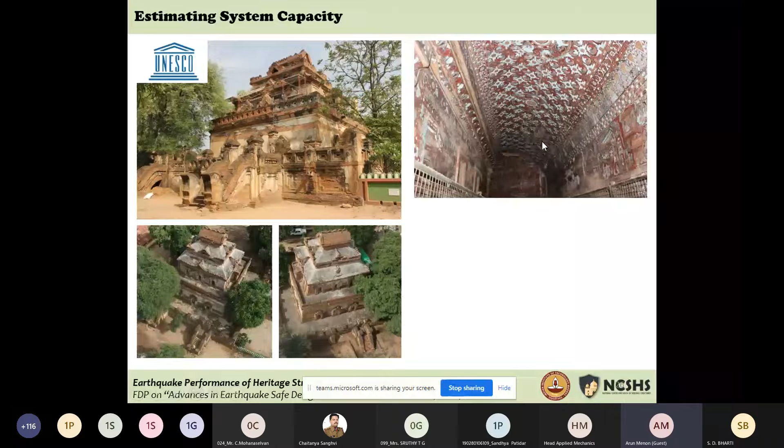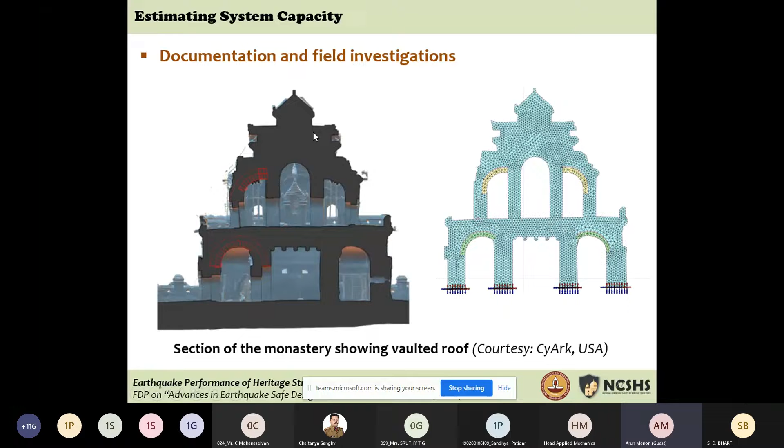So we were looking at the structure as a pilot project for further interventions. The structure was fully documented, and a finite element model was developed from it.

A continuum model could be used, as we are looking at brick masonry with mortar. The structural modeling must also be very sensitive to the kind of construction typology.

The reason I'm showing this is you can see there's an arch construction, a true arch construction. In reality, this is only ornamental, and behind it you can see that the arch is actually constructed using a technique called the corbelling technique.

So the true arch that you see as a finish is actually misleading as to what really happens behind it, in terms of the true corbelling technique.

So one has to be careful about the construction nuances and try to see if they really have to be reflected in the numerical models.

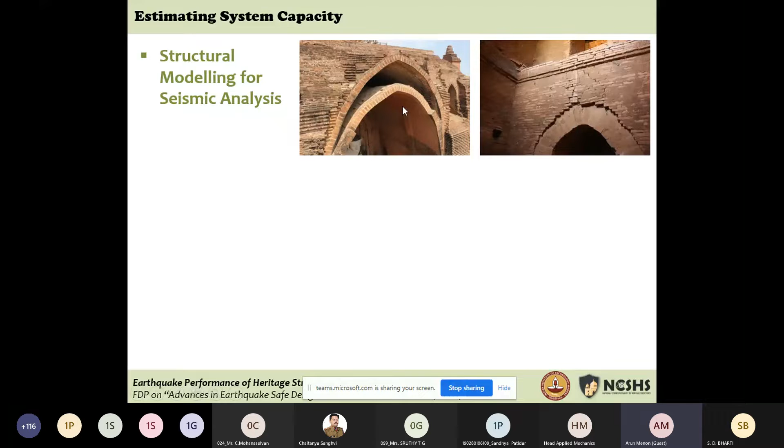You can see the same thing here: one or two layers of true arch construction. They're only like a finish, because the construction behind is a bit jagged, so this gives a good finish. But the true construction is a corbelling technique.

This needs to be incorporated, at least from a verification point of view, to check whether it has a role to play in structural safety. Such checks are essential when working with historical constructions, and understanding these variations in construction is important.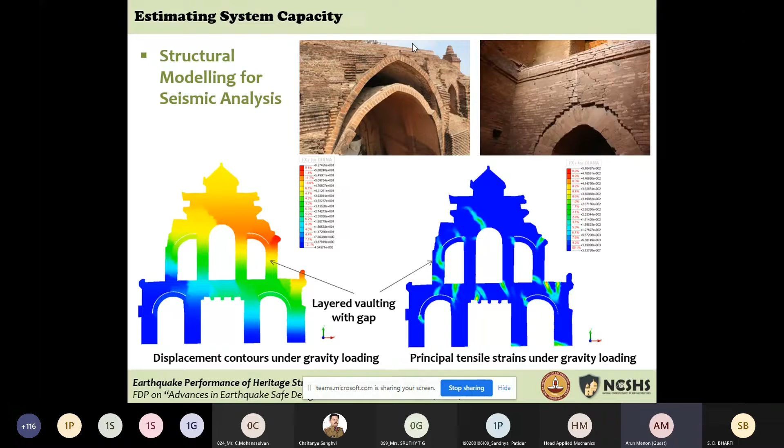We had done the analysis of the structure without any interventions, and also of the structure with the reinforced concrete tie band that was introduced after the 1975 earthquake, and our model was able to replicate the damage seen in the 2016 earthquake.

After this, we worked out other possibilities: introducing reinforced concrete tie bands in the upper floors, or introducing steel ties, removable steel ties through external post-tensioning on the upper floors, and tried to look at the behavior.

We were able to see that the response can be improved by the post-tensioning, the external post-tensioning.

And we need not really use reinforced concrete bands for the upper floors. So this sort of analysis is important.

This allows exploring alternative approaches for seismic retrofit, checking performance, and seeing which would be the most appropriate intervention to carry out.

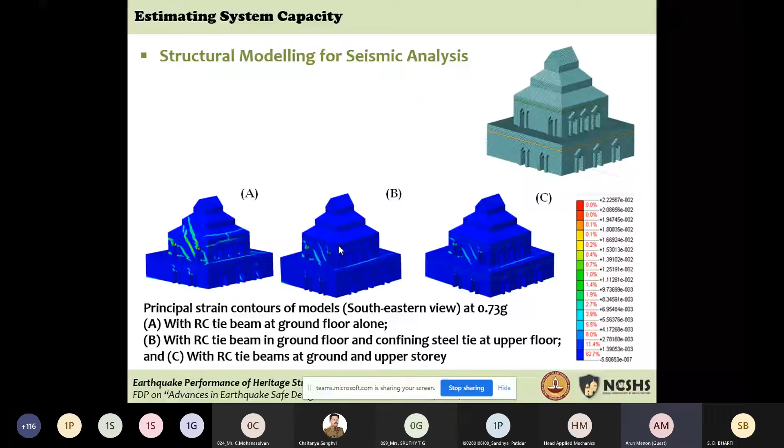So I think I would be running out of time, and I might stop at this stage because there are a few more points. They're more on the interventions that can be carried out.

But I'll stop here and go through one last thought: when working with historical masonry constructions, it's important to take a graded approach in the assessment and try to identify the weak links in the construction, which you should be able to fix through appropriate interventions and reduce the risk of the construction.

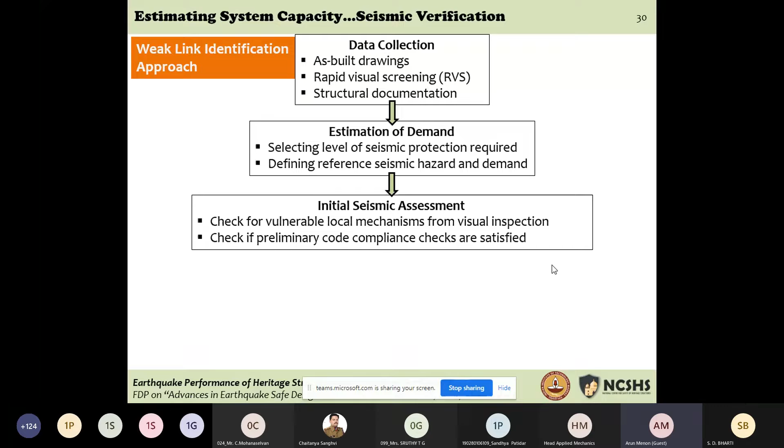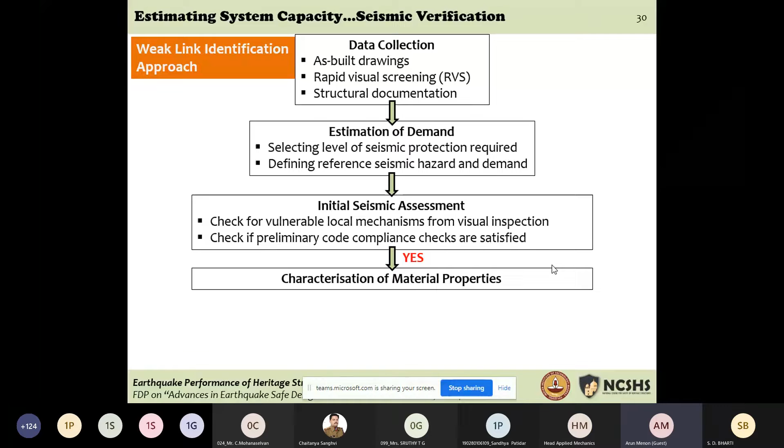So a weak link identification approach proceeds for the seismic verification. You start by collecting data, as-built drawings, do a rapid visual screening, document the structure, choose the appropriate level of seismic demand, and then do an initial seismic assessment to check whether the structure has any vulnerable local mechanisms from the visual inspection. Then check if preliminary code compliances are satisfied, ensuring there aren't glaring deficiencies in the structure. If they're satisfied, you can move towards more detailed analysis, trying to characterize the material properties.

This characterization of material properties you can either take from existing literature, if you're not able to do it on the structure. Otherwise, if you're able to do it comprehensively using non-destructive or semi-destructive testing, you'll have better information and can probably work with lower factors of safety, since uncertainties are lesser. But if you're using data from the literature, try to use lower bound material properties in the detailed analysis.

But when doing the initial seismic assessment, if you find vulnerable portions of the structure already evident from visual examination, and preliminary code compliance checks are not satisfied, then you don't go directly to the detailed seismic assessment.

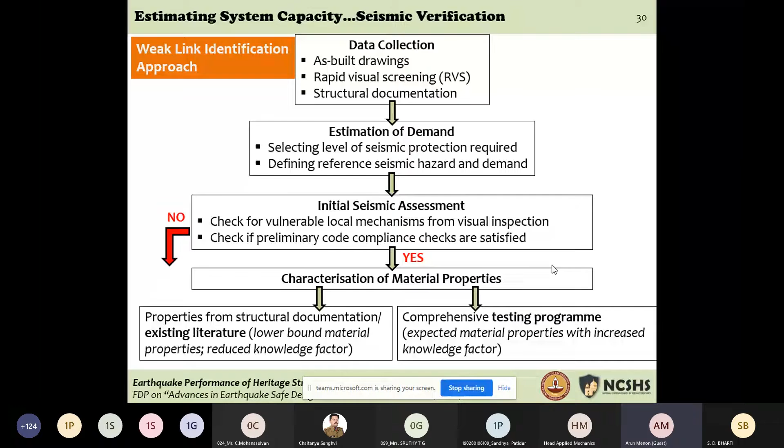You have to do what we refer to as level 1 seismic strengthening, which includes ensuring wall-to-wall connections are improved, wall-to-diaphragm connections are improved, and ensuring there is a continuous band around openings so that the integrity of the wall is maintained. You might have to strengthen the out-of-plane wall, and for this you'll need the seismic demand estimated, because you should know how much strength the connection needs and what size the RC seismic band should be. These constitute what are called level 1 seismic strengthening interventions.

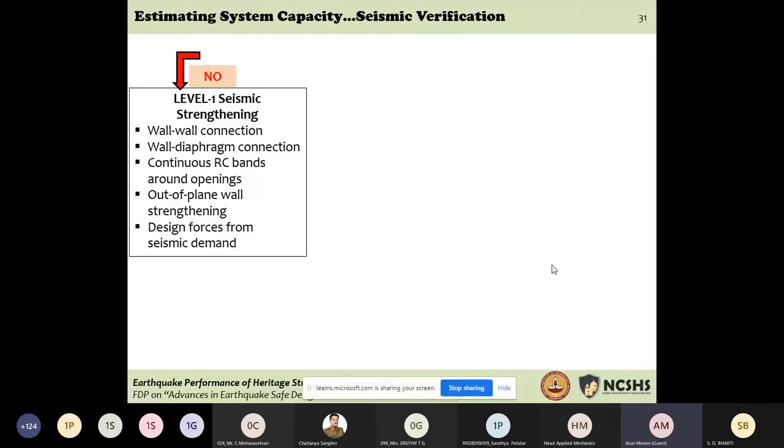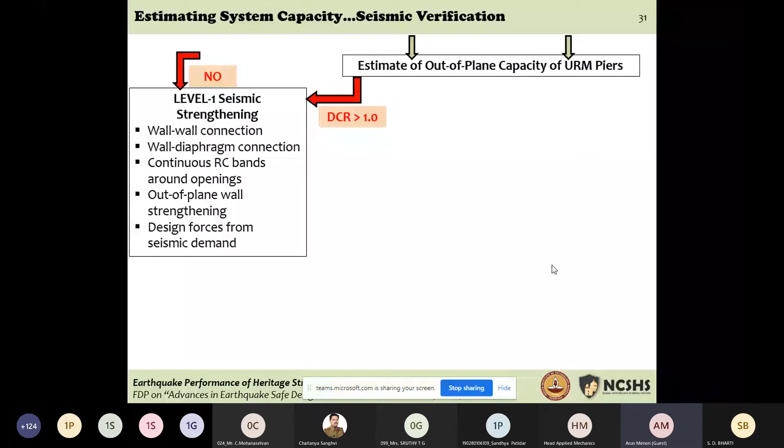Once you design these level 1 seismic strengthening interventions, you want to check whether the masonry piers have adequate out-of-plane capacity. If the demand to capacity ratio is greater than 1, you can go back to level 1 strengthening and do further strengthening like out-of-plane wall strengthening.

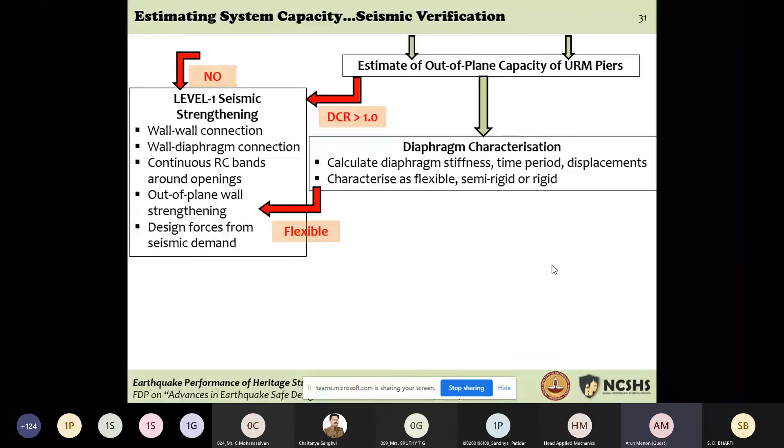If the demand to capacity ratios are not greater than 1 for the out-of-plane capacity, then look at the diaphragm, and try to characterize the diaphragms, because they can play an important part in poor or good seismic response. If the diaphragms are flexible, you might want to go back to level 1 strengthening to improve the diaphragm stiffness.

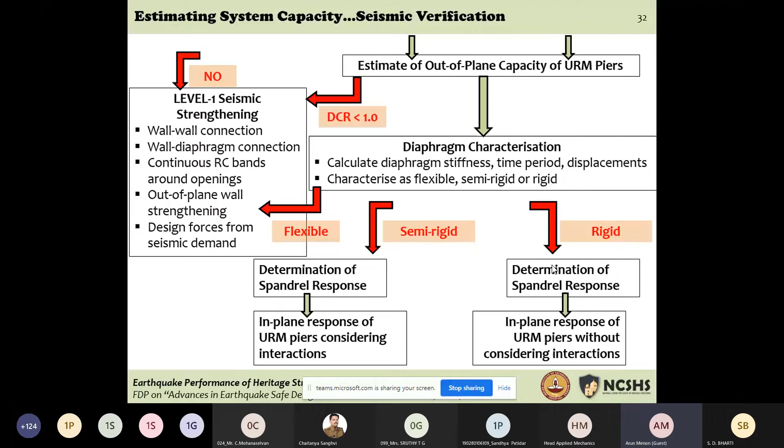If they are semi-rigid or rigid diaphragms, you want to go ahead and determine how different parts of a wall will respond, determine the response of a spandrel. There are interactions that happen between the spandrel and the pier. These intricacies in the detailed assessment can be considered between different parts of the masonry wall for in-plane global capacity. Then you can estimate, from the global demand, at what level of seismic input the structure will reach its capacity—pier capacity or wall capacity—and check whether it is adequate with respect to the seismic demand.

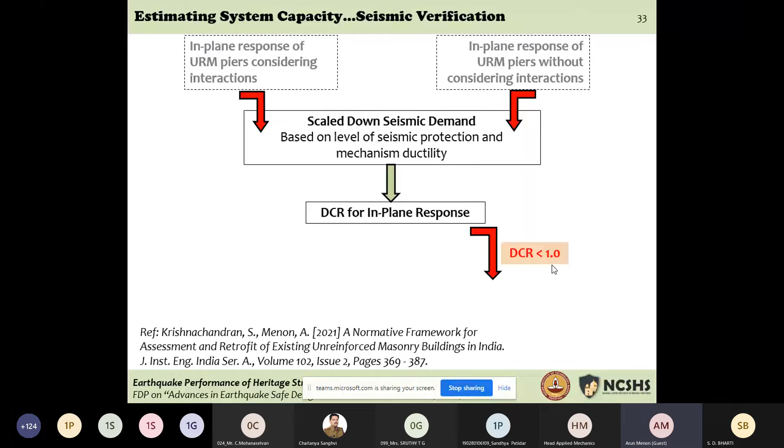And if it is adequate, then you don't need any strengthening improvement of the behavior of the piers—you can stop with level 1 strengthening. If the demand to capacity ratio for the global behavior of the piers is greater than 1, then you will need level 2 strengthening, which may be jacketing the wall, confining the wall. There may be other interventions that you will have to carry out.

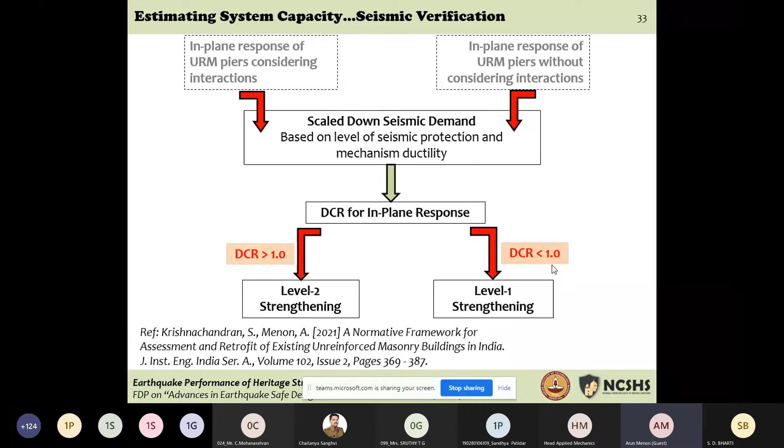So this weak link identification approach is essential to follow as far as historical masonry constructions and existing masonry constructions are concerned. As I said, I'll stop here and take some questions, because it largely covers what I had intended to do.

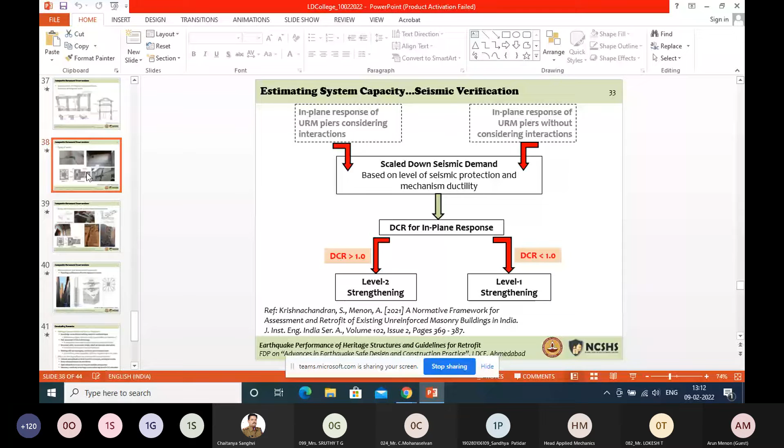Yeah, thank you. Thank you. Let me just show you.

Or if you want, you can hide this away behind plaster. That completely depends on what the designer's philosophy is, whether in the earthquake retrofit strategy you want the users to be able to see what the retrofit strategies on the building are, or you want to hide it away. This is completely up to the designer. And if you want it to appear visible to the users, you must be careful about the aesthetics of that. It should not be very different from the original aesthetics of the building, which gives a lot of room for designing it nicely with respect to the building's aesthetics.

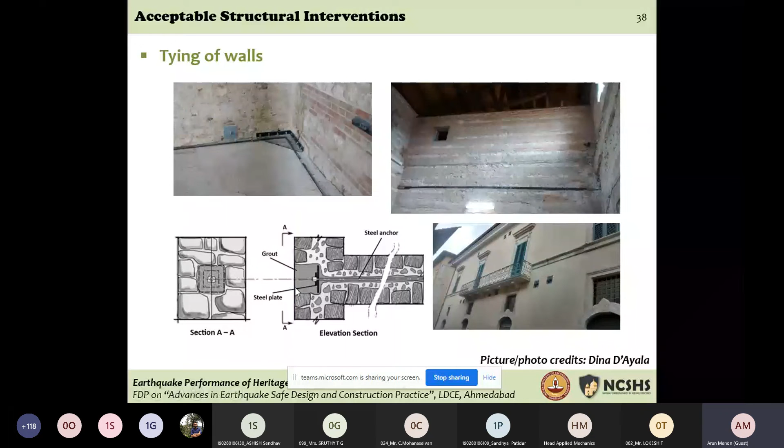Alternatively, you can hide it away like this. You see that the anchor plate is hidden behind a cut opened in the masonry and embedded with mortar and grout. This is a classical example to show you what can be done—either hide it away or make it part of the aesthetics. The usefulness of making it part of the aesthetics is that you can communicate to the users that a certain seismic strengthening or seismic improvement intervention has been carried out. It increases the awareness of safety among the end users.